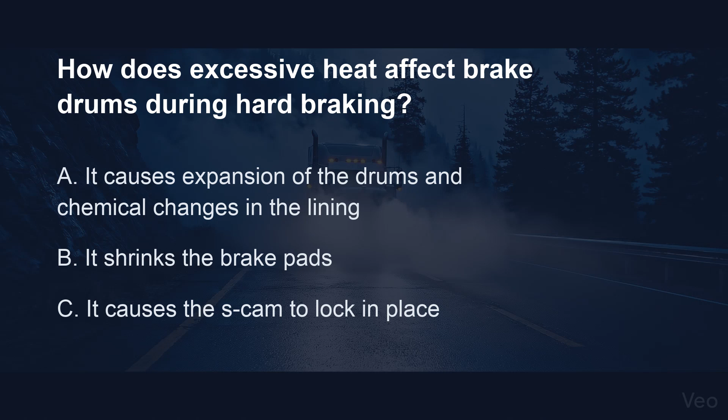Question 6. Let's see if you can get this difficult question right. How does excessive heat affect brake drums during hard braking? Option A. It causes expansion of the drums and chemical changes in the lining. Option B. It shrinks the brake pads. Option C. It causes the S-cam to lock in place.

The correct answer is A. It causes expansion of the drums and chemical changes in the lining. On a steep downgrade, excessive heat expands the drums and alters the lining chemistry, leading to dangerous brake fade.

Question 7. Get ready. This one requires your full focus. While you may or may not stop faster with ABS, what is the primary advantage it provides during hard braking? Option A. You should be able to steer around an obstacle and avoid skids caused by overbraking. Option B. It physically applies more friction to the brake drums. Option C. It automatically shifts the transmission into neutral.

The correct answer is A. You should be able to steer around an obstacle and avoid skids caused by overbraking. By pulsing the brake drums. By pulsing the brakes faster than humanly possible, the computer ensures the tires keep rolling so you can maneuver out of danger.

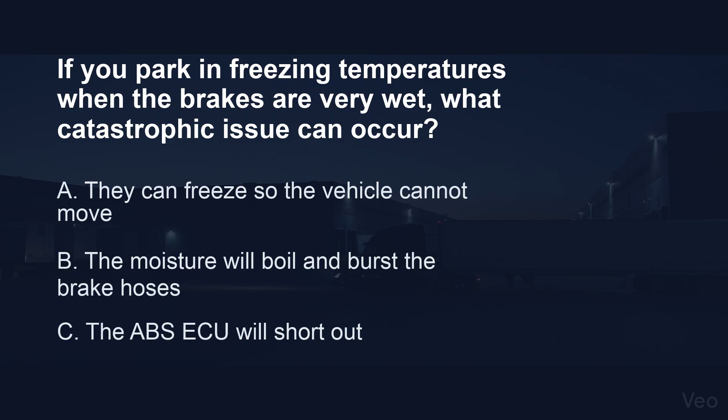Question 13. Be careful. The choices here are very misleading. If you park in freezing temperatures when the brakes are very wet, what catastrophic issue can occur? Option A. They can freeze so the vehicle cannot move. Option B. The moisture will boil and burst the brake hoses. Option C. The ABS ECU will short out.

The correct answer is A. They can freeze so the vehicle cannot move. Parking in slush and freezing temperatures can literally weld the wet brake linings to the drums overnight with ice.

Question 14. Which system does the warning light and buzzer monitor to ensure pressure does not drop below 60 psi? Option A. Both the primary and secondary systems. Option B. Only the primary system. Option C. The emergency spring brake system.

The correct answer is A. Both the primary and secondary systems. The dual air system utilizes sensors in both main tanks to alert the driver if either the front or rear circuits lose critical pressure. Question 15.

When checking brake linings, friction material, during a walk-around inspection, they must not be dangerously thin or... Option A. Painted yellow. Option B. Loose or soaked with oil or grease. Option C. Completely covered in road dust.

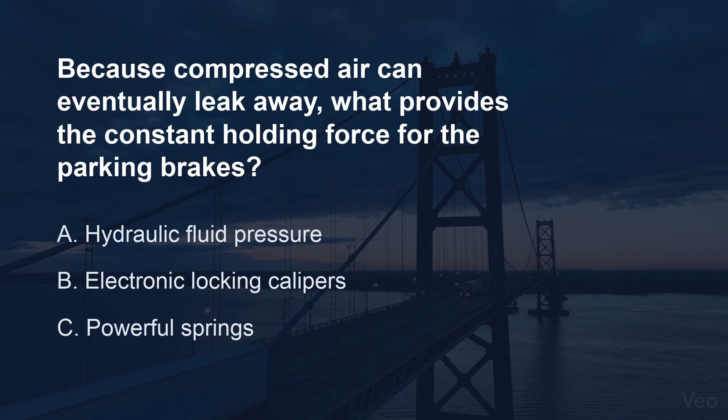Question 16. Because compressed air can eventually leak away, what provides the constant holding force for the parking brakes? Option A. Hydraulic fluid pressure. Option B. Electronic locking calipers. Option C. Powerful springs.

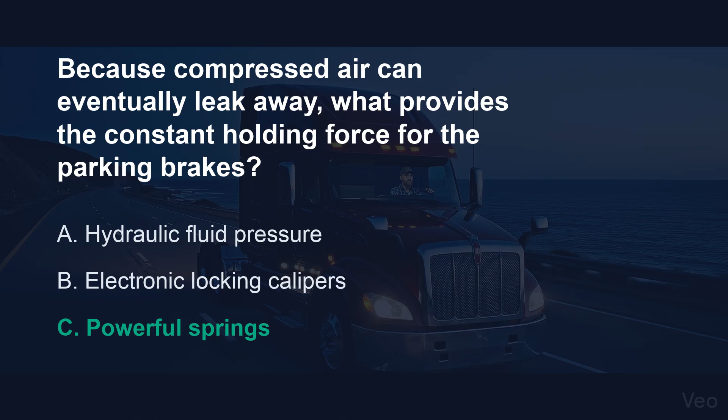The correct answer is C. Powerful springs. Parking a heavy combination on a grade relies entirely on massive mechanical springs, unaffected by air leaks overnight.

Question 17. What is the primary purpose of the parking brake system? Option A. To apply and release the parking brakes using the parking brake control. Option B. To stop the vehicle in a brake system failure. Option C. To hold the vehicle at a stoplight during normal driving.

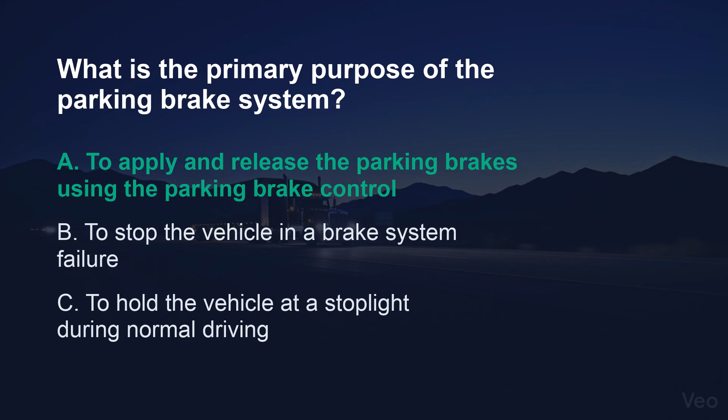The correct answer is A. To apply and release the parking brakes using the parking brake control. Drivers use this dedicated system daily to secure the commercial vehicle safely in place when unattended.

Question 18. What is the risk of leaving your commercial vehicle unattended without applying the parking brakes or chocking the wheels? Option A. The air compressor will drain the battery. Option B. Your vehicle might roll away and cause injury and damage. Option C. The brake shoes will permanently adhere to the drums.

The correct answer is B. Your vehicle might roll away and cause injury and damage. Stepping out of the cab without pulling the yellow knob can lead to a devastating runaway truck incident on a slight incline. Question 19.

Heads up. This next one is highly challenging. When manually pulling a slack adjuster during an inspection, it probably needs adjustment if it moves more than... Option A. Half an inch. Option B. About 1 inch. Option C. 2 inches.

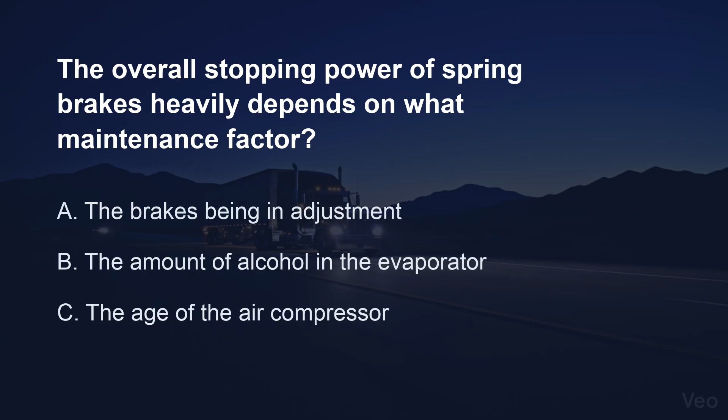Question 24. Keep your focus strong for this tough question. The overall stopping power of spring brakes heavily depends on what maintenance factor? Option A. The brakes being in adjustment. Option B. The amount of alcohol in the evaporator. Option C. The age of the air compressor.

The correct answer is A. The brakes being in adjustment. If slack adjusters are out of legal limits, even fully deployed heavy springs cannot generate enough force to stop the truck.

Question 25. Beware of the hidden trick in this next question. What mechanical component is forced outward by air pressure to move the slack adjuster in an S-cam brake? Option A. The return spring. Option B. The brake chamber push rod. Option C. The wedge.

The correct answer is B. The brake chamber push rod. Pressing the foot valve sends air into the chamber, which shoves this rod outward to begin the mechanical braking process.

That's the end of this practice test. Did you answer at least 80% of the questions correctly to pass? Let's move on to the next one.

Question 26. This question is designed to confuse you. Stay sharp. Which of the following describes the proper action during the stab braking method once the wheels start rolling again? Option A. Gently pump the brake pedal. Option B. Apply the brakes fully again. Option C. Shift into a higher gear.

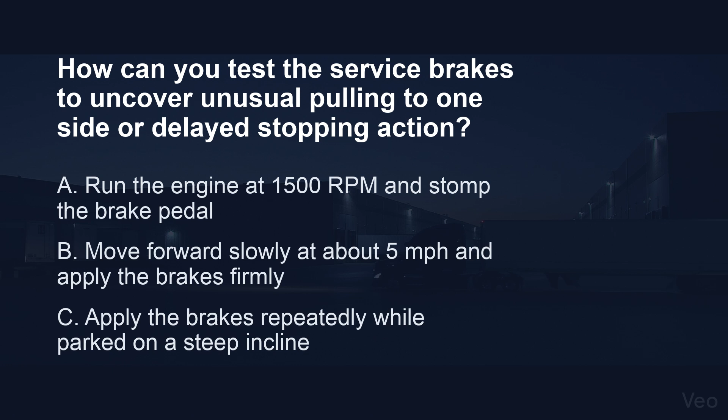Question 35. This one tries to trick you. Listen closely. How can you test the service brakes to uncover unusual pulling to one side or delayed stopping action? Option A. Run the engine at 1,500 revolutions per minute and stomp the brake pedal. Option B. Move forward slowly at about 5 miles per hour and apply the brakes firmly. Option C. Apply the brakes repeatedly while parked on a steep incline.

The correct answer is B. Move forward slowly at about 5 miles per hour and apply the brakes firmly. Performing a slow rolling brake test in the yard ensures the steering wheel won't violently jerk sideways when braking on the highway.

Question 36. This is a tricky one. Listen to all choices carefully. What is the secondary force that pushes back against your foot when you push the brake pedal down? Option A. The air pressure going to the brakes. Option B. The spring tension of the slack adjuster. Option C. The resistance of the front limiting valve.

The correct answer is A. The air pressure going to the brakes. Alongside a physical spring, the actual compressed air pushing back through the treadle gives the driver a natural feel for braking power.

Question 37. What does the yellow malfunction lamp on the instrument panel indicate when you start a newer commercial vehicle? Option A. It comes on for a bulb check, and then goes out quickly. Option B. It indicates the air tanks are fully drained. Option C. It warns that the spring brakes are currently applied.

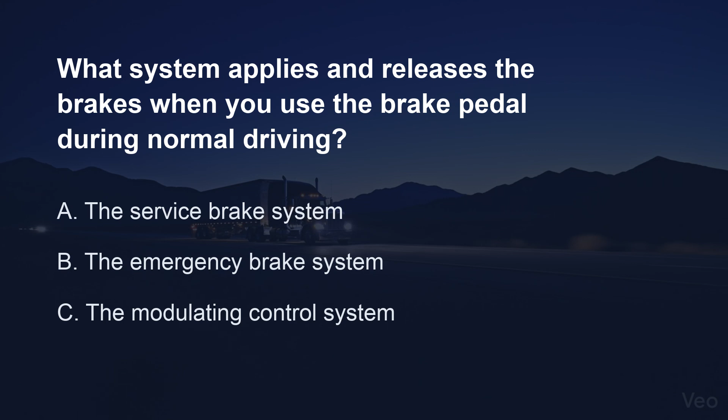Question 38. What system applies and releases the brakes when you use the brake pedal during normal driving? Option A. The service brake system. Option B. The emergency brake system. Option C. The modulating control system.

The correct answer is A. The service brake system. Navigating through city traffic relies entirely on the service brake system to bring the vehicle to routine stops.

Question 39. Stay sharp. You'll need to think about this one. Why should you never push the brake pedal down when the spring brakes are on? Option A. It will immediately drain all air tanks. Option B. It forces the governor to cut out. Option C. The brakes could be damaged by the combined forces of springs and air pressure.

The correct answer is C. The brakes could be damaged by the combined forces of springs and air pressure. Applying the foot valve while parked can crush brake components under the immense dual pressure of springs and compressed air.

Question 40. When driving a tractor-trailer with ABS on all axles, how should you brake in an emergency stop? Option A. Fully apply the brakes. Option B. Pump the brakes rapidly. Option C. Use only the trailer hand valve. The correct answer is A. Fully apply the brakes. Because the computerized system prevents wheel lockup, you can safely apply full brake pressure during a sudden hazard.

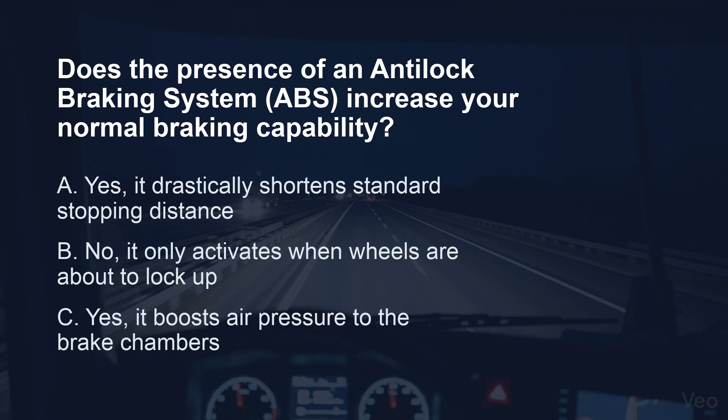Question 43. Listen carefully. The wrong answer looks very right. Does the presence of an anti-lock braking system, ABS, increase your normal braking capability? Option A. Yes, it drastically shortens standard stopping distance. Option B. No, it only activates when wheels are about to lock up. Option C. Yes, it boosts air pressure to the brake chambers. The correct answer is B. No, it only activates when wheels are about to lock up. During routine stops, the ABS computer remains dormant and does not enhance the foundation brake's stopping power.

Question 44. At what pressure is the safety relief valve usually set to open? Option A. 125 psi. Option B. 150 psi. Option C. 60 psi. The correct answer is B. 150 psi. If a malfunction causes too much pressure in your first tank, the safety valve will open at 150 psi to protect the system.

Question 45. Listen closely. This is a tough one. How do out-of-adjustment brakes directly contribute to brake fade on a vehicle? Option A. They freeze in cold weather. Option B. They stop doing their share, overloading the other brakes. Option C. They drain the air tanks rapidly. The correct answer is B. They stop doing their share, overloading the other brakes. If one wheel's brake is loose, the remaining well-adjusted brakes absorb all the friction heat and rapidly overheat.

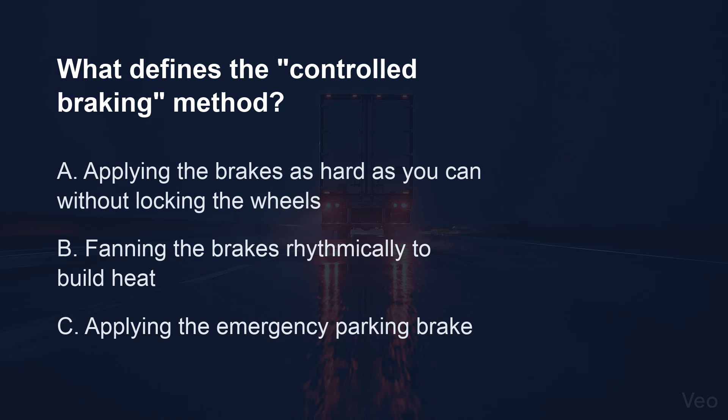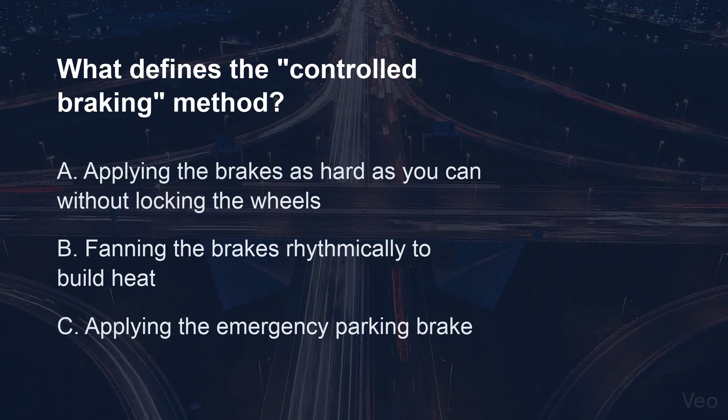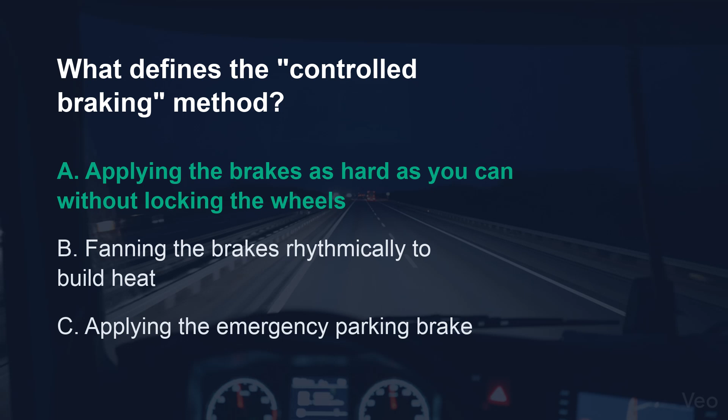Question 46. What defines the controlled braking method? Option A. Applying the brakes as hard as you can without locking the wheels. Option B. Fanning the brakes rhythmically to build heat. Option C. Applying the emergency parking brake. The correct answer is A. Applying the brakes as hard as you can without locking the wheels. Squeezing the pedal firmly just to the threshold of a skid ensures maximum stopping power while retaining steering control.

Question 47. If the service brakes fail, what spring-loaded dashboard handle allows you to apply the spring brakes gradually? Option A. A front brake limiting valve. Option B. A dual parking control valve. Option C. A modulating control valve. The correct answer is C. A modulating control valve. Encountering a total air loss allows a driver to use this progressive dash lever to carefully apply stopping friction.

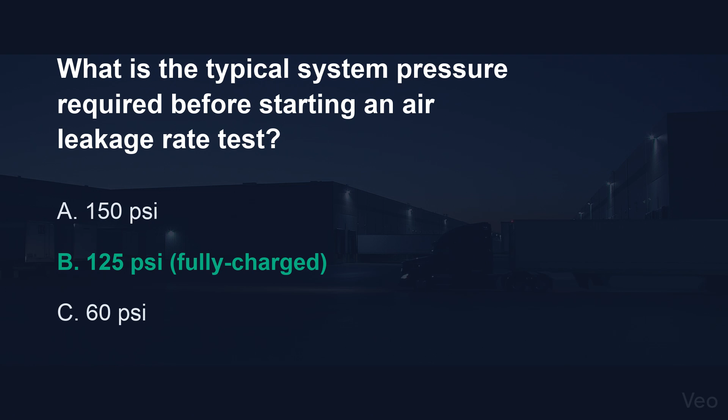Question 48. What is the typical system pressure required before starting an air leakage rate test? Option A. 150 psi. Option B. 125 psi, fully charged. Option C. 60 psi. The correct answer is B. 125 psi, fully charged. To accurately measure system tightness, you must build pressure until the governor cuts out, typically around 125 psi.

Question 49. Keep your focus strong for this tough question. In an air-operated disc brake, what specific part pushes the brake lining pads against the disc? Option A. The caliper. Option B. The return spring. Option C. The power screw. The correct answer is C. The power screw. When the slack adjuster turns, it rotates this threaded mechanism to clamp the brake pads tightly onto the metal rotor.

Question 50. What should you specifically look for when checking the air compressor drive belt during an engine compartment inspection? Option A. Its exact length and serial number. Option B. Its condition and tightness. Option C. Its color and temperature. The correct answer is B. Its condition and tightness. Squeezing the compressor belt with your hand verifies it isn't cracked or slipping, ensuring reliable air pressure generation.